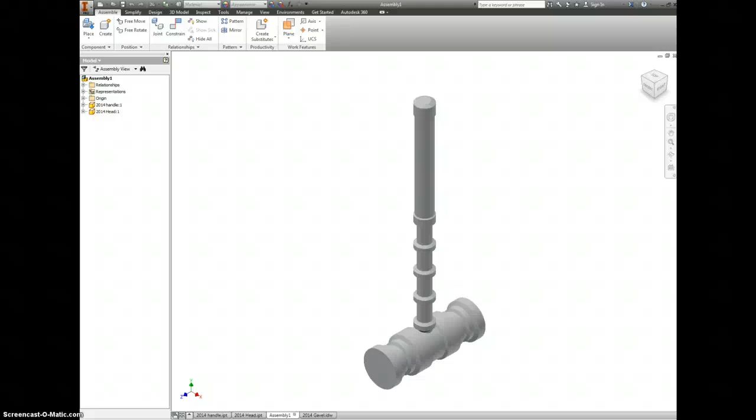Your next project is the gavel. This is what you would make in Metals 1. It has two parts, just the handle and the head.

We're going to start off with this part right here. So let's go to New, Part, create a 2D sketch. I'm going to select one of these planes, and use the Circle tool.

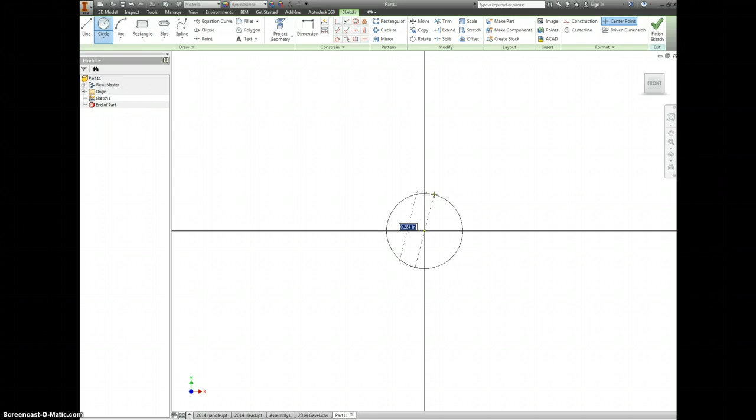For the head, the main diameter of it is 1 inch. If you finish your sketch and extrude, we're actually going to select the mid-plane extrusion. Make sure you pick this one.

The total length of it is 2.75. And this would be the stock piece of material you would start with.

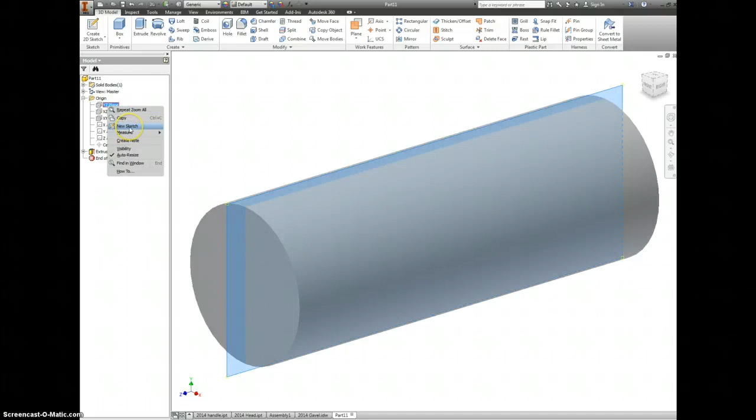So you'd chuck this up into a lathe, and to simulate taking material off of it, we're going to pick one of these planes, say the YZ, say New Sketch, and rotate this back around.

Right click and pick Slice Graphics, and now we're going to project the geometry around the outside of it, the top edge and the side here. This is giving us reference lines that we can use with other things.

To show that we're going to cut into it, we're going to pick our rectangle tool and draw a rectangle towards the top of it.

This is what I'm looking at here. We're going to make a rectangle go from this chunk all the way over to here, so that's 0.25 from the first edge and 0.7 to the next edge.

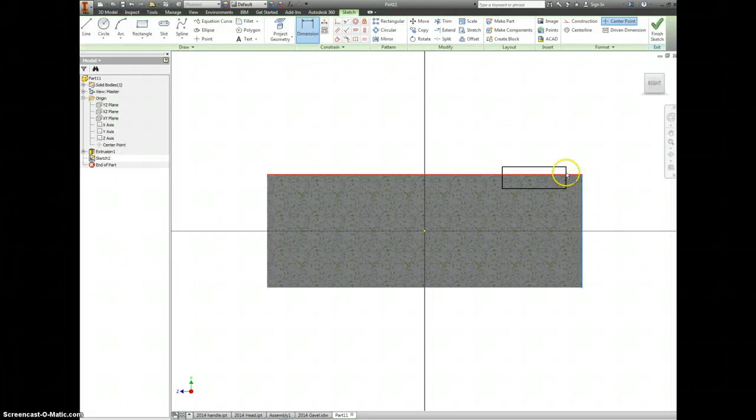So let's go Dimension, 0.25, and 0.7.

Now we want to know how far down this rectangle is going to be cut, because right now this could cut all the way down, it can cut all the way up. There's no indicator on where this should be yet.

So let's look back at our drawing. It says the diameter of this is 0.82, but that's from top to bottom. So if we want half of that, it's going to be 0.41.

Or we could do it the lazy way. Pick our origin, pick the bottom of the line, and say 0.82 divided by 2, and let Inventor do the work.

And the last thing we have to do, it says on your drawing that all angles are congruent to 60 degrees, which means that these outside angles are actually 30 degrees.

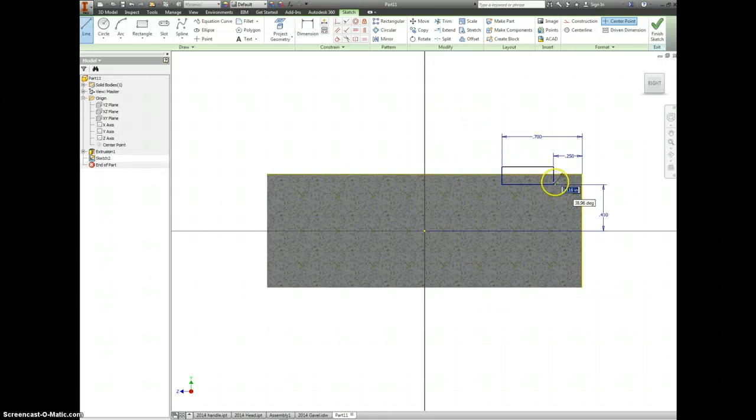Let's go back to your part and draw a line. If you hit Tab, you can pick an angle, so you type in 30, hit Enter.

As long as it connects back, we don't care what that looks like. Same kind of thing here: connect at the corner, hit Tab, type in 30, Enter, and connect back to your main shape.

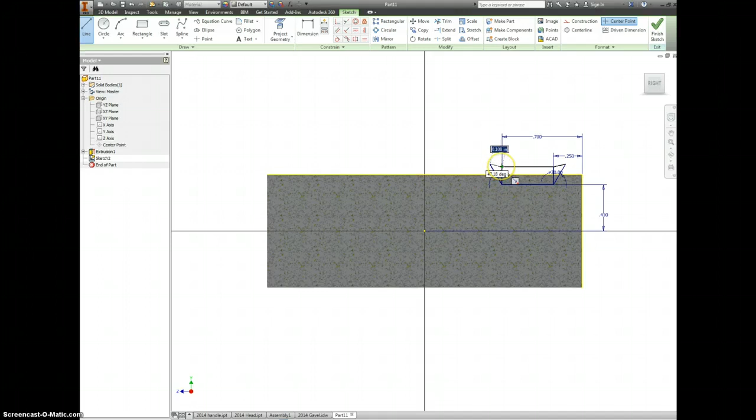Let's finish this sketch. And to show that we are removing material, we have to go to Revolve. We're going to pick all three of these shapes.

For the axis, we're going to pick the Z-axis in my case. And since you are removing material, select Cut and click OK.

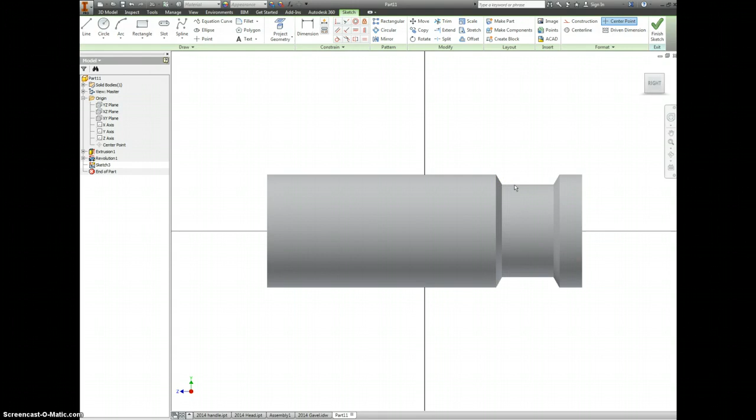Let's make a new sketch, again on the YZ plane. So we're going to come back in here and make a new rectangle.

It's going to be somewhere in the middle of this. We have to right click and go back to Slice Graphics again, and should probably project geometry again.

From this edge to this point is 0.43, and actually I think that dimension is supposed to say 0.425.

So let me change the units on this. 0.425.

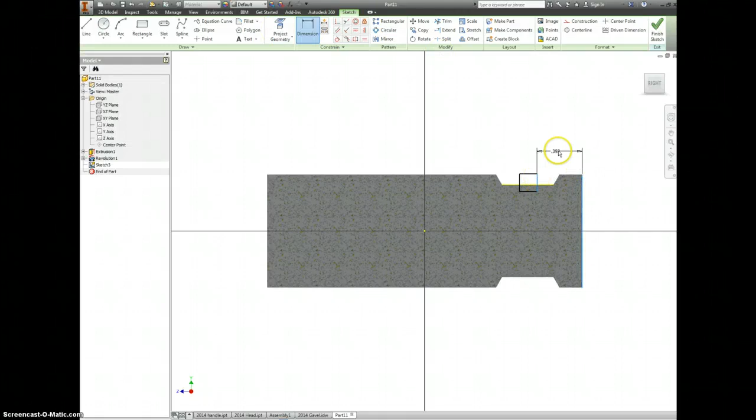And to the next side, we don't have this line, but we do know from here to here is 0.1.

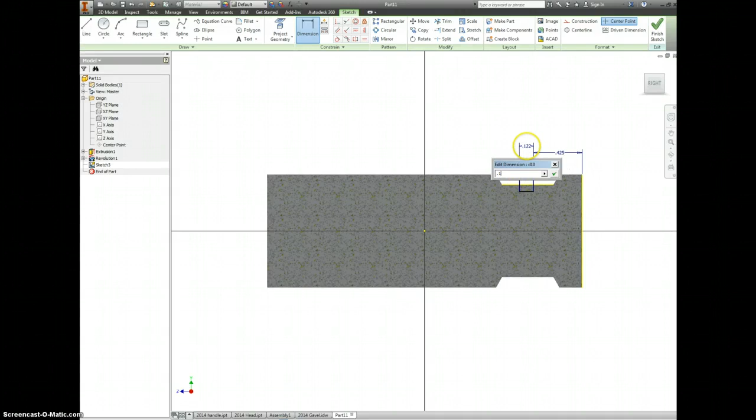So let's go back to dimension, call this 0.1, and the distance from this point to here...

Again looking back at our drawing, it's 0.688, so half of that: 0.688 divided by 2.

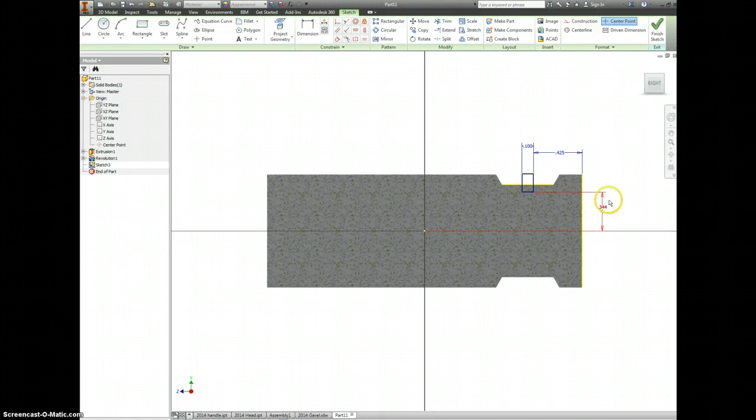0.344. We still have to show the angle of our cutting bit that's on there. It's 30 degrees again.

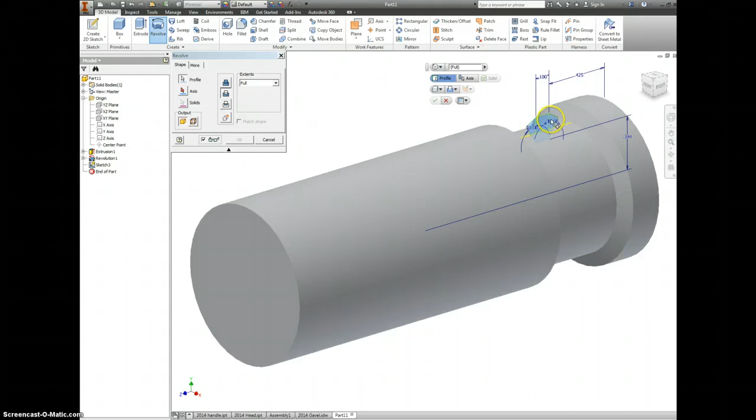Finish your sketch, revolve, cut, pick the three shapes for your profile, select the Y-axis again, click OK.

Now if we look at it from the side, we have these all cut, they're looking pretty good. So we have almost half the part made.

Let's cheat, and we'll use the 3D modeling feature mirror. Instead of going through and doing all the geometry again, we're going to pick for features revolution 2 and revolution 1.

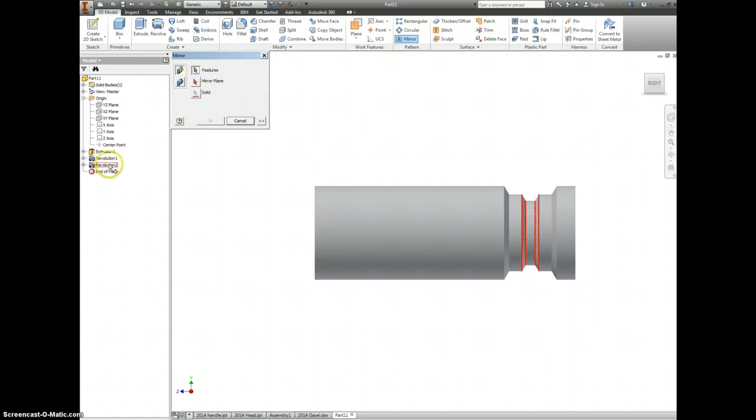For the mirror plane, because we did mid-plane extrude, we can pick the XY plane and select OK. Now we have left and right are identical.

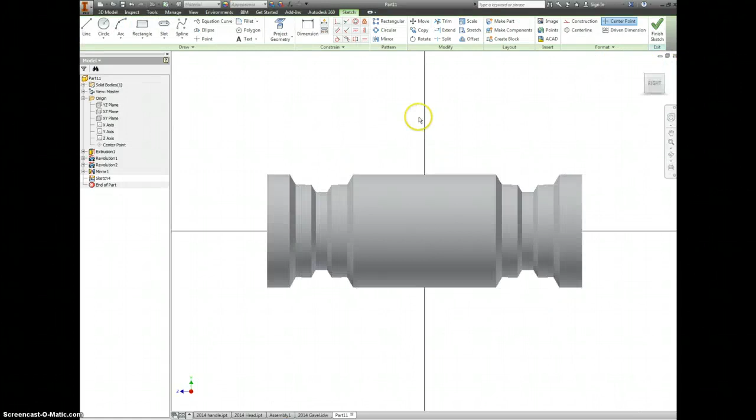Okay, let's go back to our YZ plane and make a new sketch. Right click, slice graphics.

Rectangle tool. Let's project the geometry at the top and at the side.

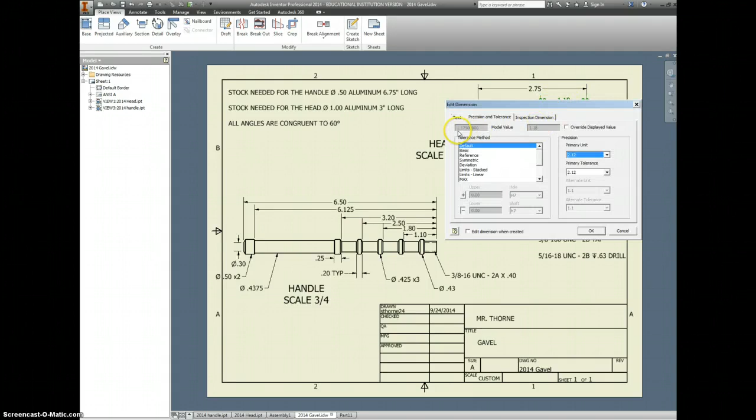And it shows on our drawing here that this is 0.4 wide and it's over 1.18. Let's see, it's actually 1.175 from the edge.

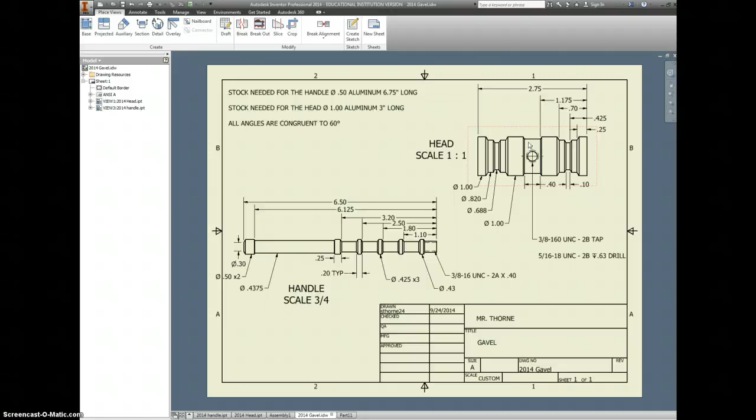Double check that's supposed to be 0.4. Yes. And the diameter of this doesn't say on here, let's check that.

0.88. Let's see if that's supposed to be something else. 0.875.

Okay, and we'll fix this later. So from this point to here, 0.875 divided by 2. Select your line, corner, make that a 30-degree angle.

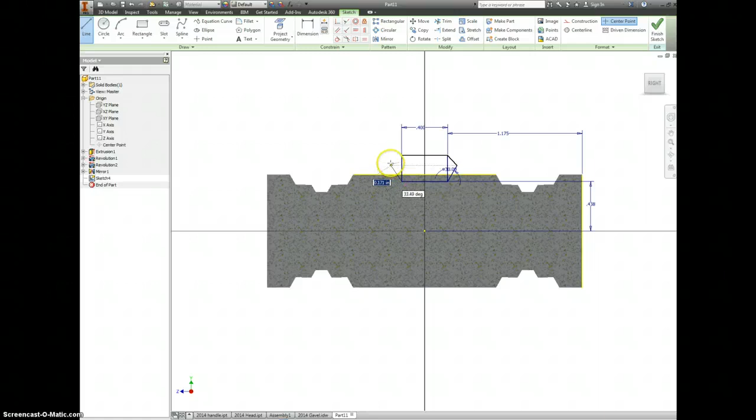So we have the length, we have the distance from the edge, we have the 30-degree angles, we have the distance from the center. Let's finish our sketch.

Revolve, cut, pick our three profiles. For the axis, let's select the Y-axis again, click OK.

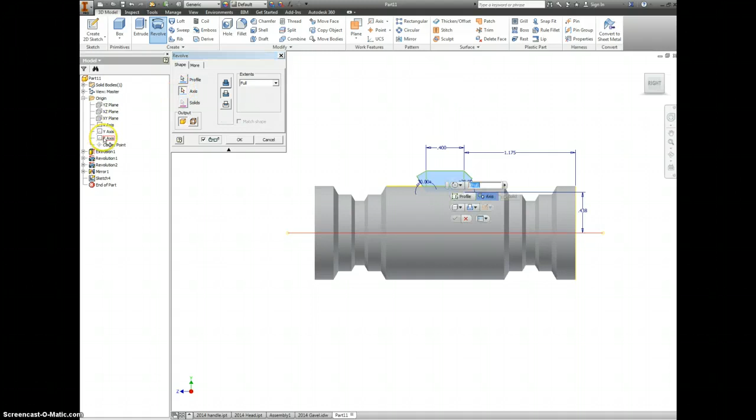And the last thing that we have to do is make a hole on the top of this, a tapped hole. So we have to click on plane, pick this surface, then we have to use a reference plane.

And that is going to be the XZ plane. So now what we just did, if we look at it from the right side, is we made this plane tangent to this surface.

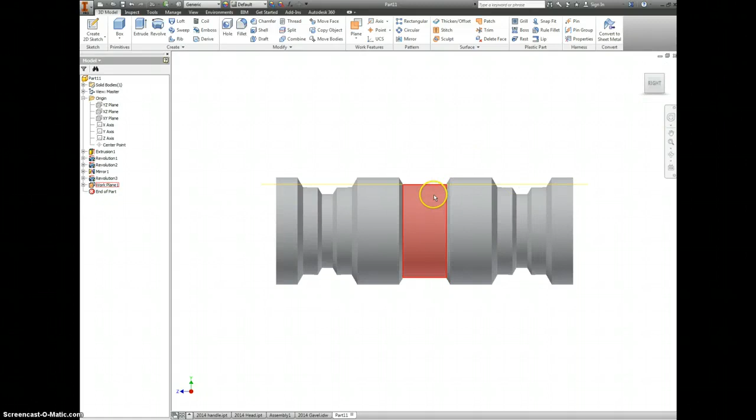Right click on the plane, so it has to highlight as red, and make a new sketch. We're just going to use that point there, so click point, and back on the origin, finish your sketch.

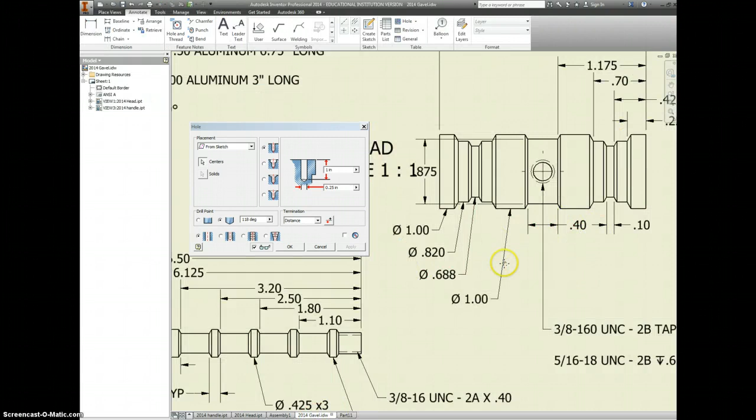And we're going to make a hole here based off of these hole dimensions. So this says it is 3/8, 16 UNC for the tap.

That's what you would start with in the shop. You're going to finish though 5/16, 18 UNC, and you're going down 0.63, I think is 0.625.

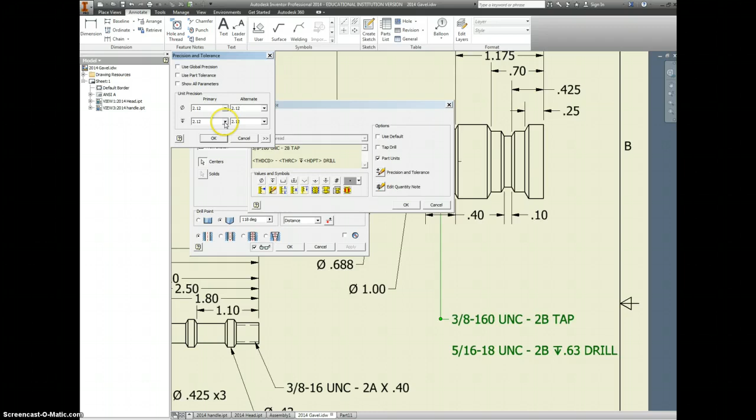Let's check the tolerance on that. Yep, 0.625 depth, so 5/16, 18 UNC.

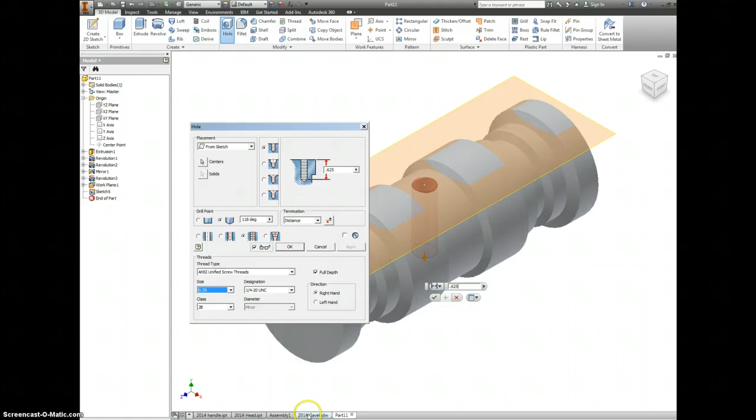For distance, I said 0.625. It's going to be a tapped hole. Five sixteenths.

Oh, lost my hole note. Five sixteenths is 0.3125, so 5/16, 18 UNC.

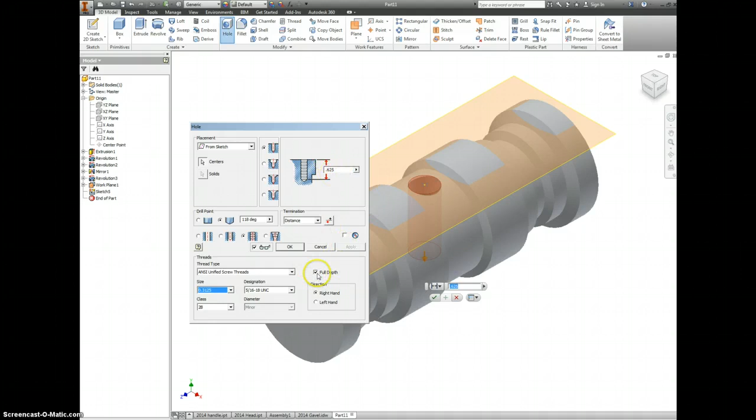This taps the full depth, and distance is 0.625.

Looks good. Let's right click on this sketch, take off the visibility so we just have a part, and save this, and you should be done.